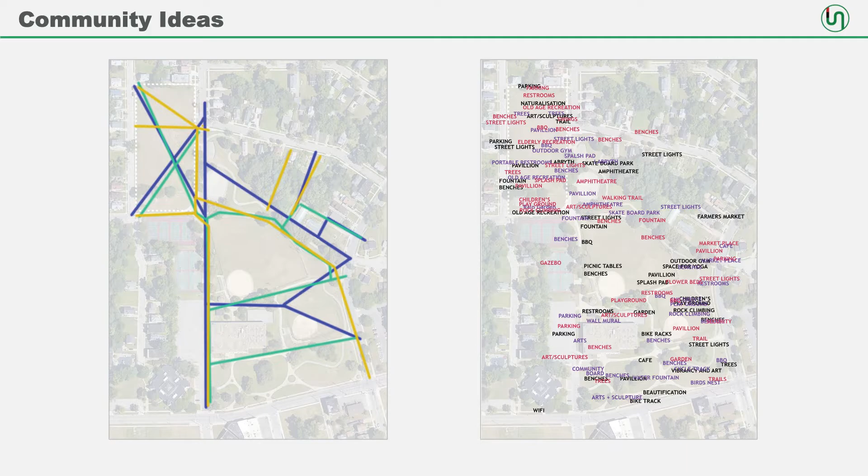With the thoughtful advice of Western Reserve Land Conservancy, our team decided to work within the Clean Ohio grant constraints for the Hough Community Green Space and envision an aspirational master plan that catered to community needs that were not eligible for the Clean Ohio grant.

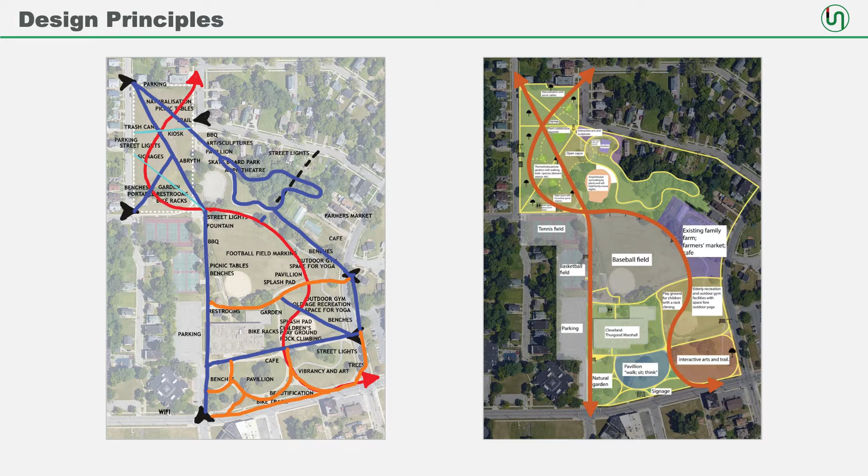Connect is the primary design element. The main design intervention is the connection from Hough Avenue to the Hough community's interior residential area. Other walking trails have been incorporated into the design to improve connectivity and create nodes that will serve as the space's main activity points. We hope to connect Village Family Farm to this large community space programmatically rather than physically.

Then comes strengthen. The main goal of these design interventions is to strengthen the neighborhood's already existing social character through community congregation and regular community engagement by providing spaces that are flexible and can adapt to any community need. The social and commercial value that the Village Family Farm provides to the community will strengthen the community space.

Finally, the community is able to thrive. The ultimate goal is for the community to develop these well-thought-out flexible spaces over time, making it an incremental development project that adapts to the needs of the community.

This is an aspirational master plan in which the current Thurgood Marshall Recreation Center open space and Hough Community Green Space are comprehensively planned with programs that complement each other, and, as one community space, adhere to the needs of the neighborhood.

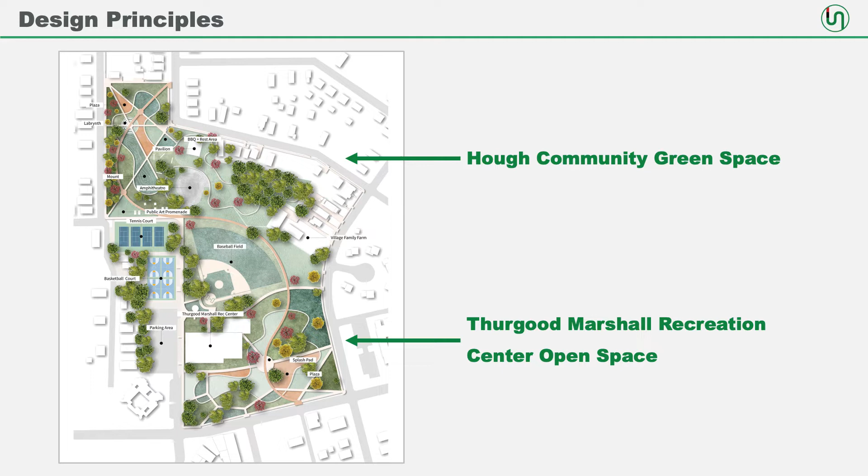This is where we propose incremental growth, with the community developing this park with the principles' proposed spaces as funds become available. The areas near Hough Avenue in this community space are activated by lively activities such as children's play areas, splash pads, and outdoor gyms that serve people of all ages, making it the active portion of the community space.

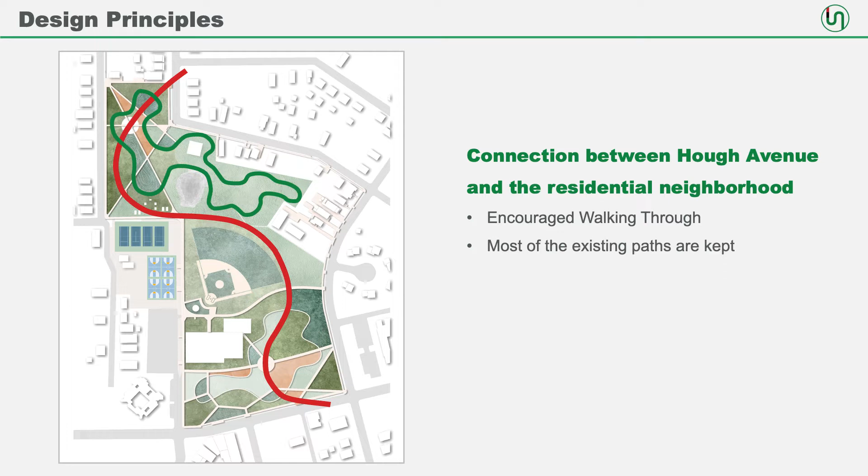The primary design intervention is the connection between Hough Avenue and the residential neighborhood. These increases encouraged walking through the Hough Community Green Space, providing people with the most scenic, yet shortest route into the neighborhood. Most of the existing paths are kept, with minor changes made where necessary.

The point of attraction will be the intersection of the curved and linear paths, which will act as a gathering area. There will be a softscape hierarchy throughout the park based on the needs and use of the space. This will allow us to estimate maintenance costs and make better use of our budget.

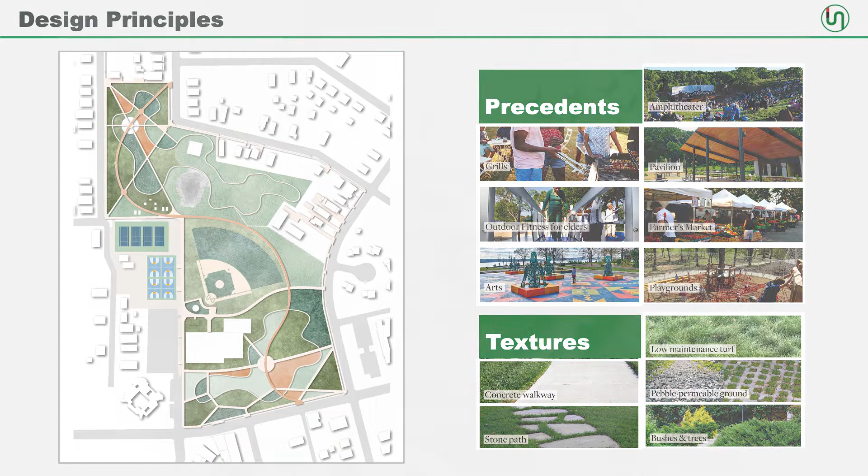For example, a manicured lawn where daily activity is expected can coexist with small shrubs where human activity is least expected. Native flower beds will be used for color and to add natural vibrancy to the park. Mounds are strategically placed to add a layer of varying topography and to create landscapes that encourage informal discussions and congregation.

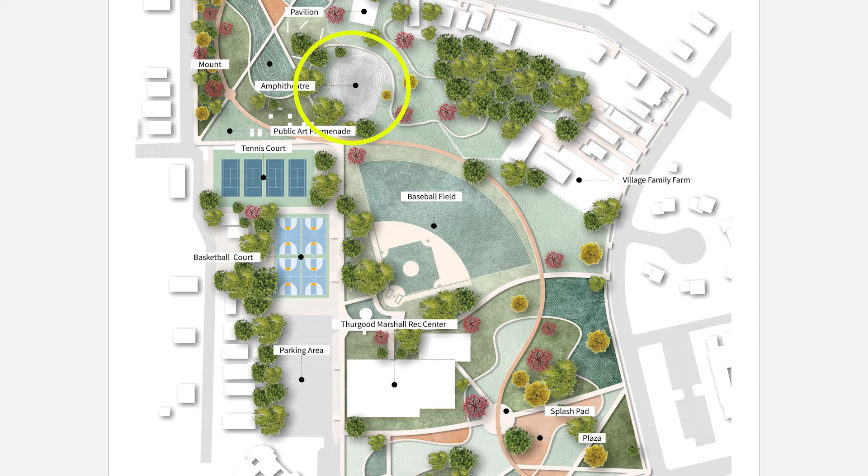The proposed and sited facilities are based primarily on community feedback and grant constraints. The Hough Community Green Space includes the amphitheater programmatically, while the Thurgood Marshall Recreation Center serves as a pivot for the overall master plan.

The trail that physically separated the Hough Community Green Space from the amphitheater has been strategically removed. The Hough Community Green Space aspires to be the more intimate community space, with programs and facilities catering to the immediate neighborhood, whereas the Thurgood Marshall Recreation Community Space is intended to serve as the face of the neighborhood, attracting people from surrounding areas to use it.

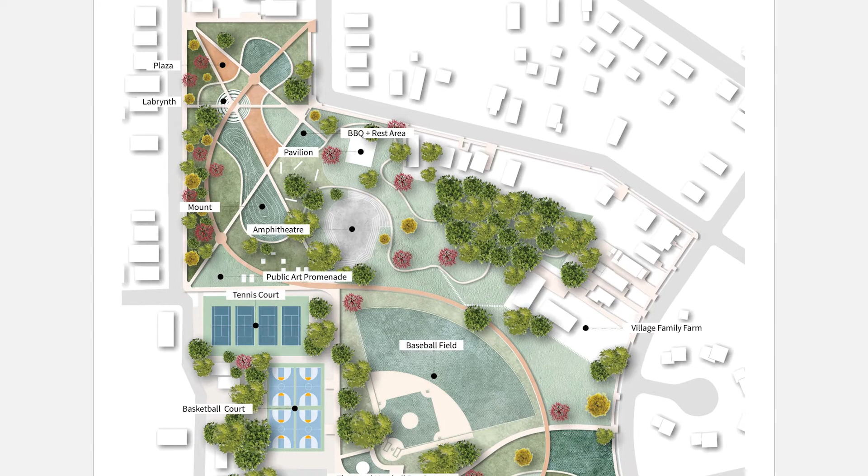Through design interventions that blur the physical boundary between community and commercial space, Village Family Farm becomes a part of the overall programmatic design of this community park.

The Clean Ohio Grant, the principal inspiration for most of the design decisions for this parcel, encourages naturalization. We used naturalized elements such as native trees, mounds, native flowers, diverse grass covers, and small parcels of permeable hardscapes on this parcel of land.

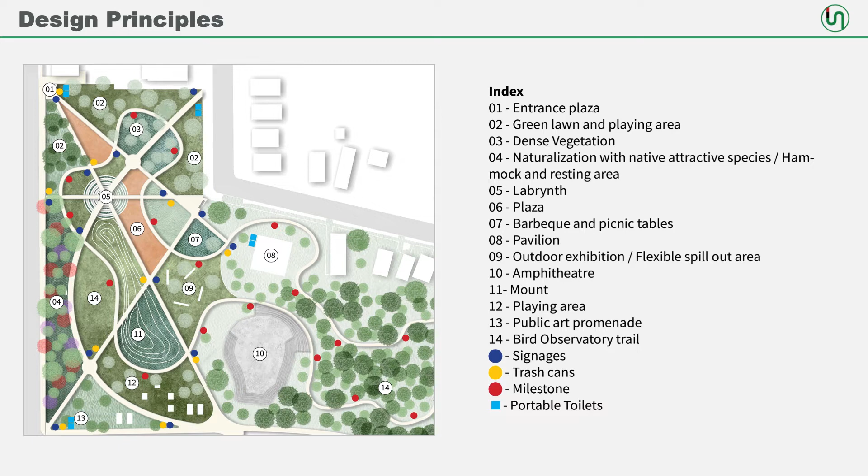Although not physically or administratively part of this land parcel, the amphitheater and pavilion become the primary physical built elements of our design. They are the elements that tie this property to the Thurgood Rec Center open space.

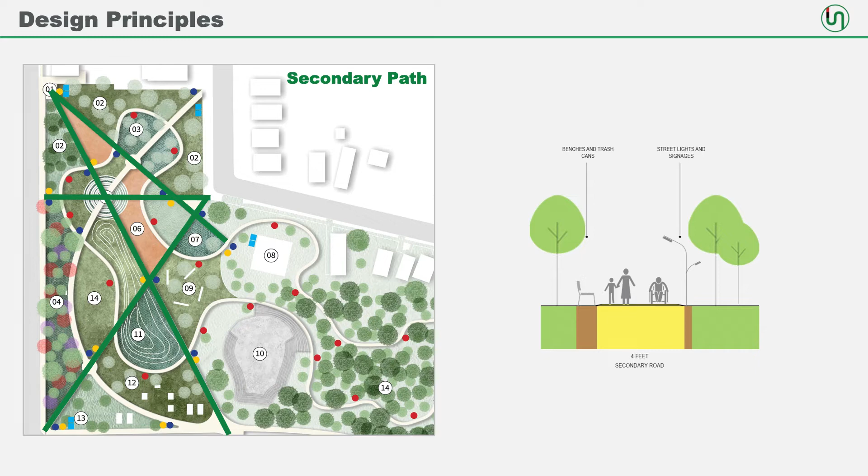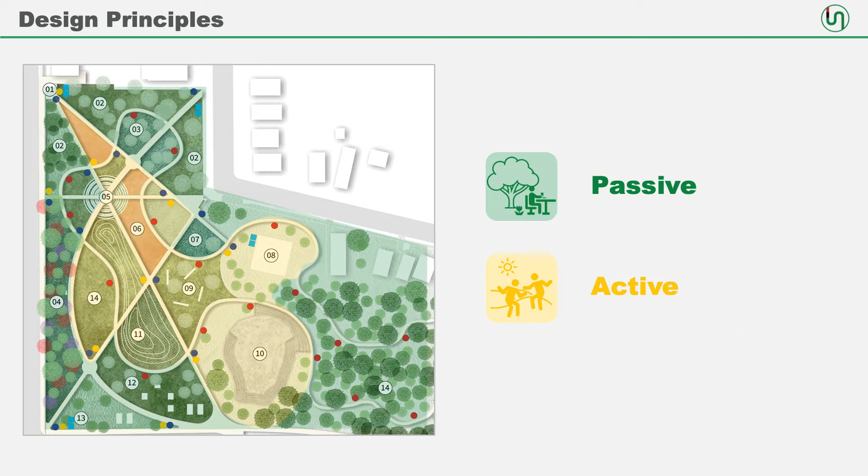Hough Avenue, which runs through the space, is connected by a curved path. Secondary trails connect to this path from various entry points, forming a trail network. As a result of high demand during the community meeting, a special trail has been created for residents to walk and exercise on. This trail winds through dense forest, providing both fresh air and shade.

We concentrate on some of the technical aspects of the design intervention. The first is the lighting plan.

As the Unity Park's proposed operating hours are 6 a.m. to 9 p.m., lighting plays an important role in the aesthetical character, usability, and safety aspects. We value safety as the most important goal, so we have designed the lighting to be bright enough for children, elderly, and disabilities to walk safely during the nights.

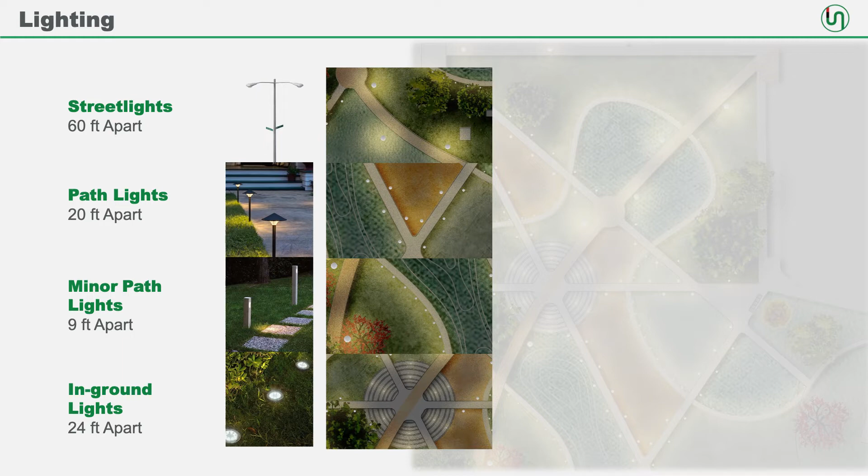The lighting elements will also have a hierarchy, with the brightest lights placed on the main arteries and trails where pedestrian movement is anticipated on the higher side. To provide a feeling of comfort, ambient lighting is proposed along tertiary lights and strategic points in open public spaces.

Since lighting and its operating costs are typically high, the lighting fixtures we propose are hybrid in nature. They can harness solar energy via built-in solar panels and then use city utilities to light up the park as needed, particularly during the winter. It requires a significant initial investment but provides a guaranteed return on investment.

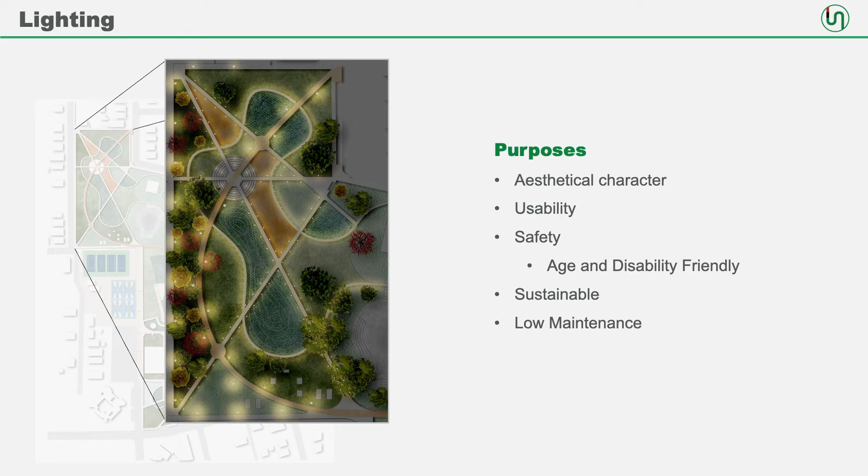Planting plan is another aspect. Naturalization, as previously stated, is the primary driving design principle. Plants and their varieties define the character of the spaces we intend to create.

To visually attract residents into the park, native trees that change colors in the fall and have attractive blossoms in the spring are proposed on the west side of Unity Park.

Native flowers and colorful shrubs have been proposed near the hard permeable surface and grassy areas to add a splash of color to the space. To create a natural signage for the park, a red mulberry tree will be planted on the site.

We have also designed three themed gardens that contain different species as an educational element while providing beautiful views. To provide shade during the hot afternoon hours, dense foliage along the walking trail and shading trees at a certain distance from main artery roads have been proposed.

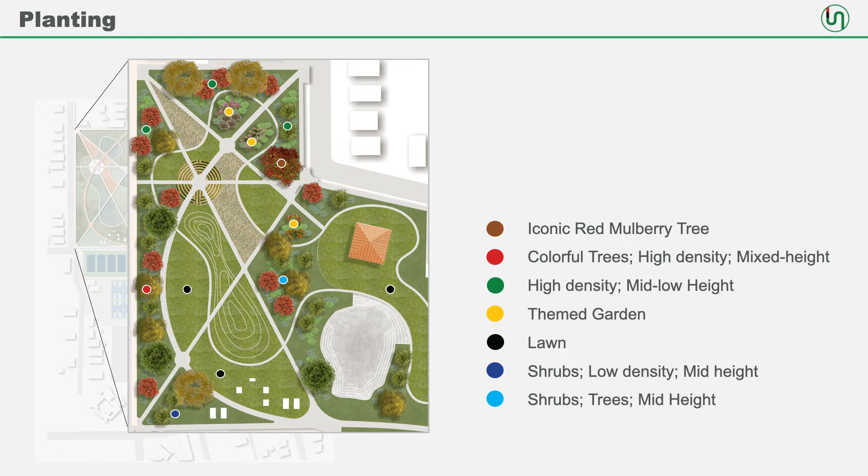Wayfinding signages assist visitors in exploring the park's full potential and the public spaces it provides. They will be provided at all strategic locations to improve pedestrian efficiency.

We use the Cleveland Metroparks wayfinding standards for parks in the Cleveland area, including the recommended color scheme, interstate font, and approved symbols. Signage would describe the basic functions of the spaces, direct people to important landmarks, and provide information, such as labeling all native plants with their native names and information about them.

On the walking trail, distance markers will be placed to assist people in tracking their walking workout. Community boards will be placed at key nodes and physical landmarks throughout the park to keep the community up to date and informed about upcoming events.

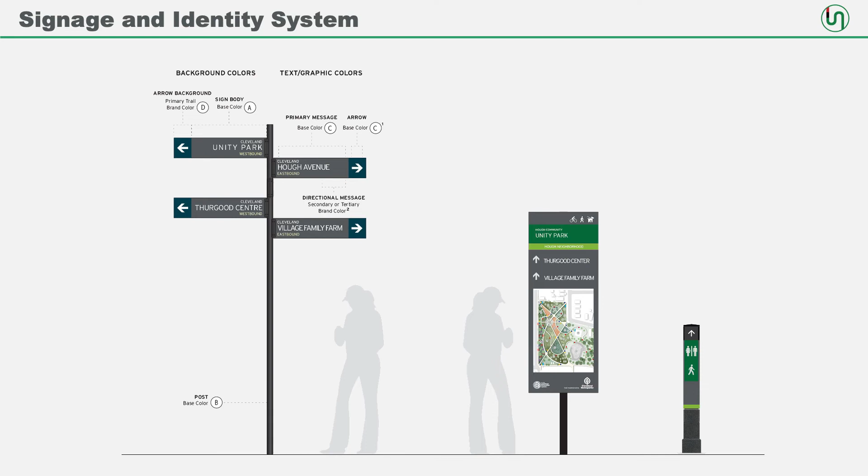For the identity of the park, we have designed a set of logos and icons to be used in the park, especially at the entrance point and on the signages. We combine the word Unity with the shape of the curved path to create a unique and representative identity system for the park.

Now it's time to take a peek at the future views of the park.

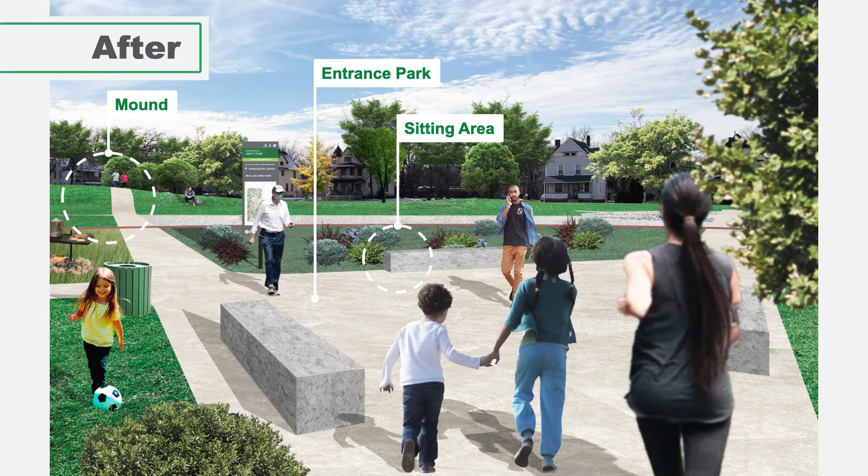At the end of this video, we have some development proposals for the vacant parcels nearby. We believe that along with the park, there should be policies in place to activate the neighborhood, whether commercial, residential, or mixed use, to make it livelier.

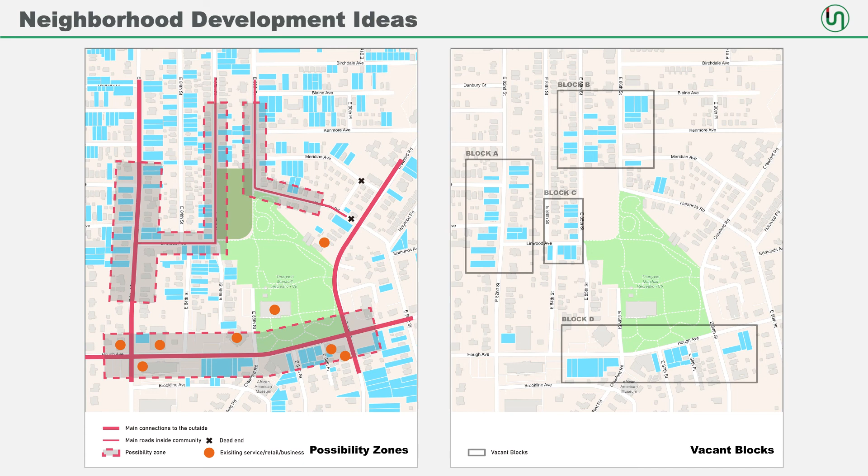From our preliminary study of the neighborhood, we observed a lot of vacant parcels around the proposed Unity Park. So we managed to find the areas with the most potential, divide them into blocks, and propose some ideas for the vacant parcels inside those areas.

There could be multifamily houses and single families proposed in the vacant parcels on the interior side of the neighborhood. We propose mixed-use building typology, dominated by the commercial character, on the vacant parcels present on Hough Avenue, as it has potential to attract outside investment.